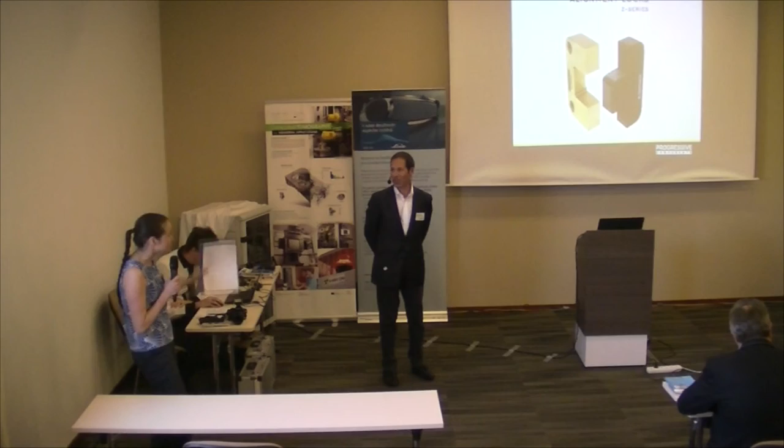I will have to do it in English.

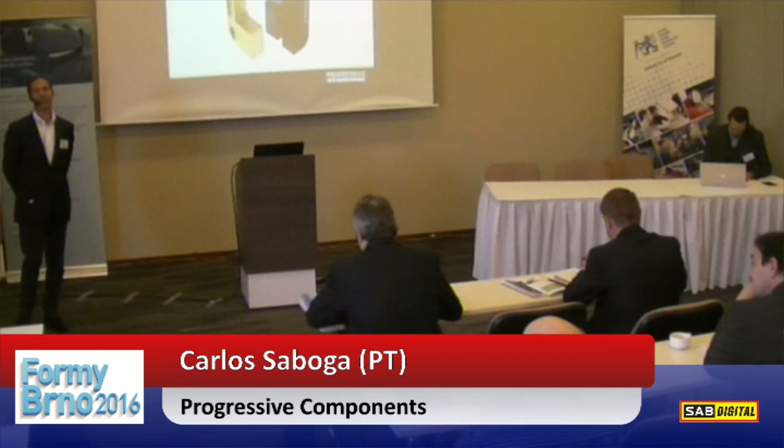We are proud to develop new solutions and come up with components that make a difference.

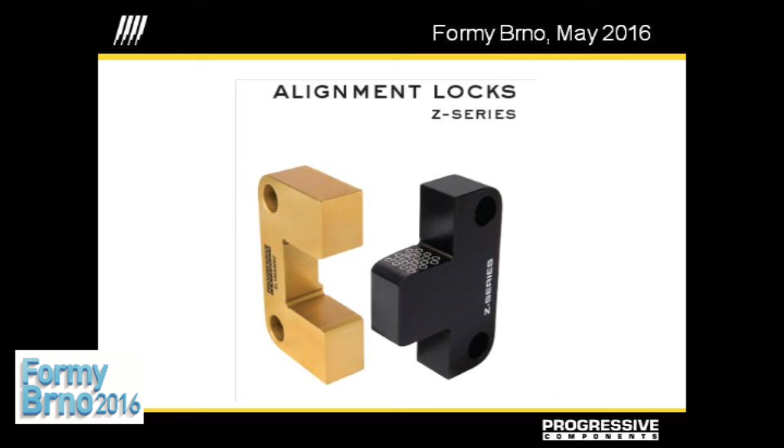Well, because ours, Progressive, make a difference. And I'll tell you why.

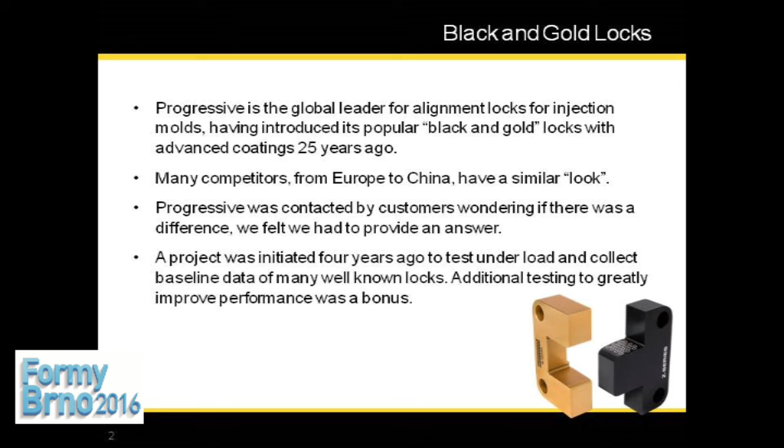This is just a picture of top locks, a pretty common installation in a mold of top locks.

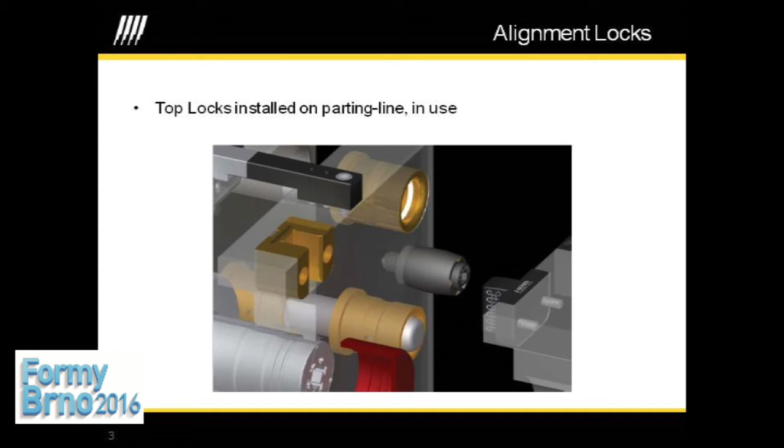So first of all, what is causing misalignment on molds? I don't know how many of you are tool makers, but I'm sure that you all do perfect molds. You do fantastic molds, the best molds in the world.

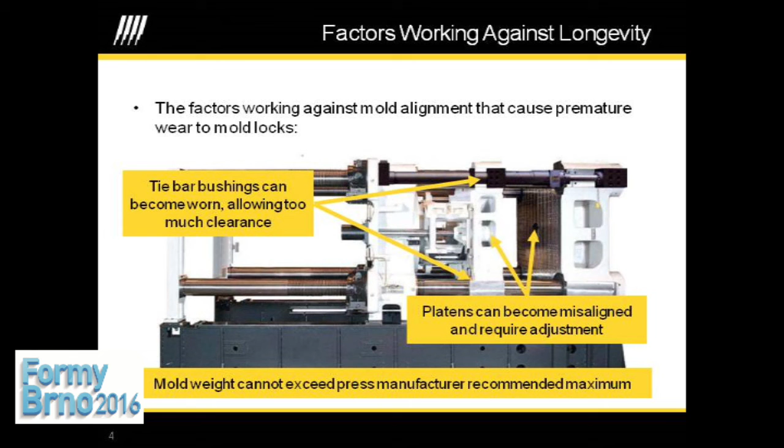And injection molders put very heavy molds, heavier than they are supposed to, in certain presses. And obviously, the press is not set to support that kind of weight.

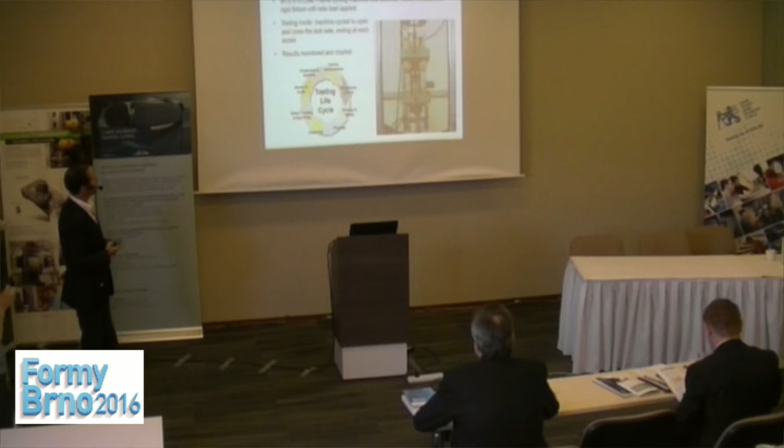And we cycled the different alignment locks, closing and opening, and making sure that every time the opening makes the locks come out of each other. So they are not always touching each other. It's just like replicating a mold.

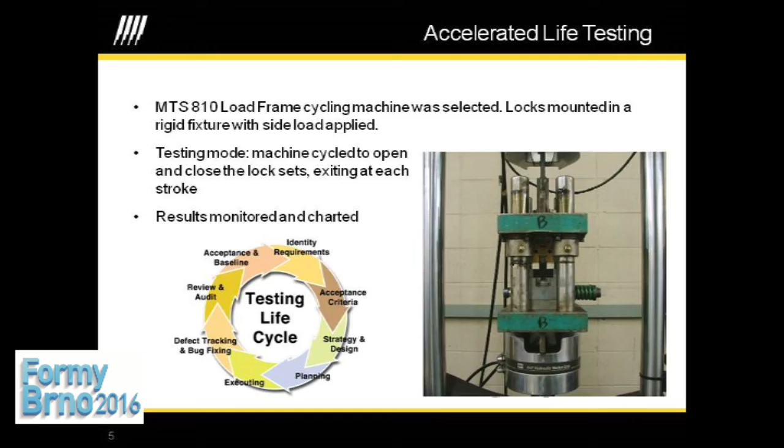Still, we found in some cases with some of the locks that we have tested already adhesive wear at 67 cycles. So some of them have started to have the adhesive wear at 67 cycles. That's nothing. That's not even trying the mold.

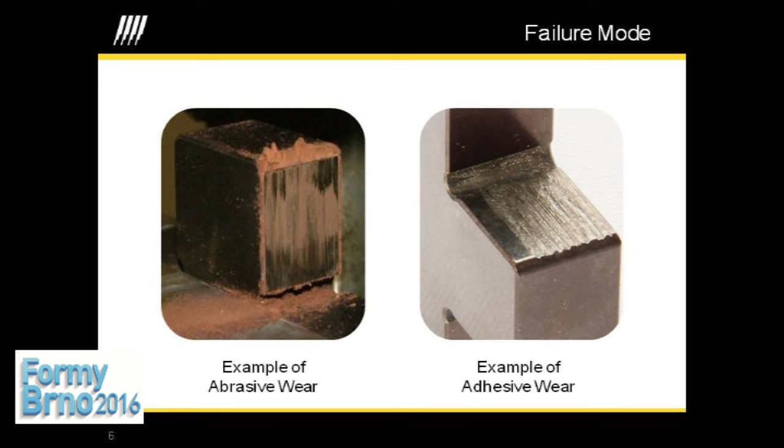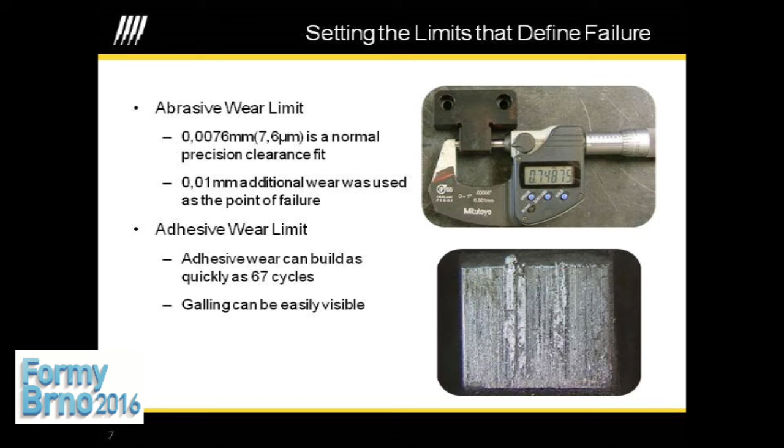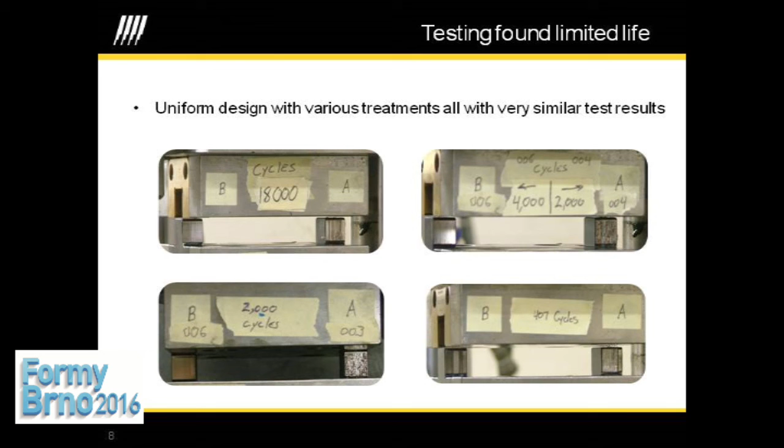So what this test also helped us to do was to benchmark and to find out how could we improve our own locks. And I will not be able obviously to share with you all the information, but we have some proprietary methods of hardening and coating our own locks.

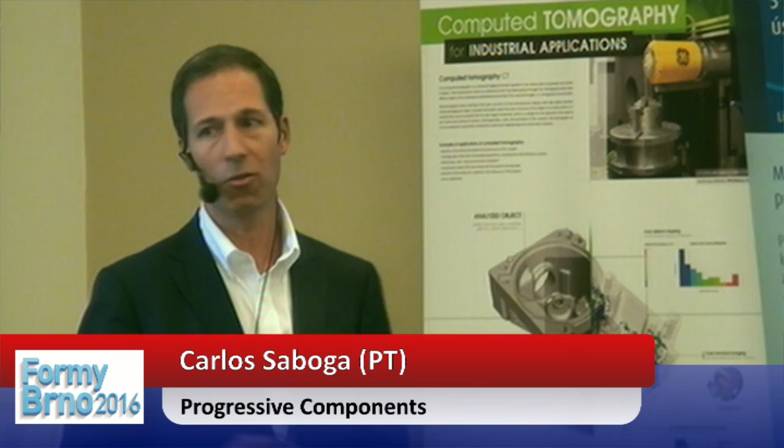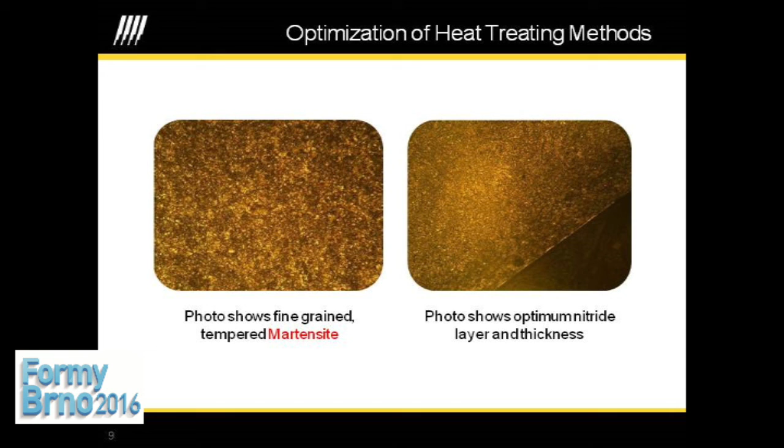So some of the different features we've got, the engagement ramp.

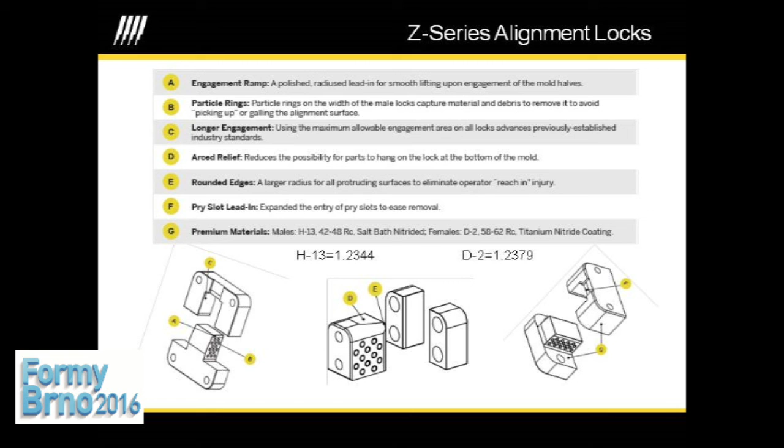That together with our proprietary methods of heat treatment and the coatings, we've got titanium nitride and we've got salt bath nitride.

All this combination makes a very strong lock.

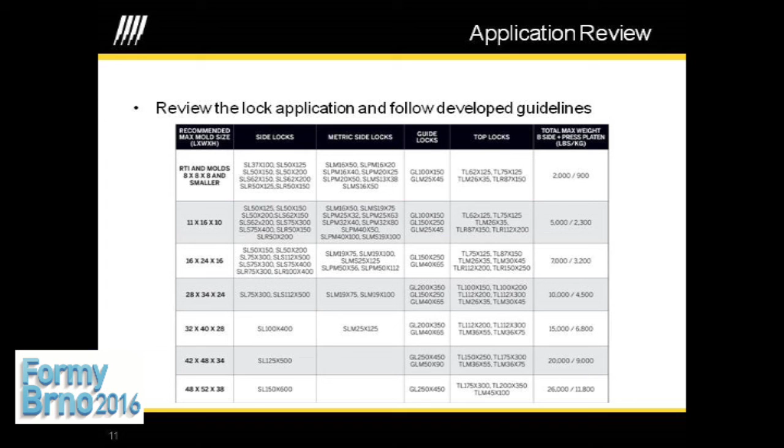We have customers that run this dry, without any grease. We do not recommend that, but it's possible.

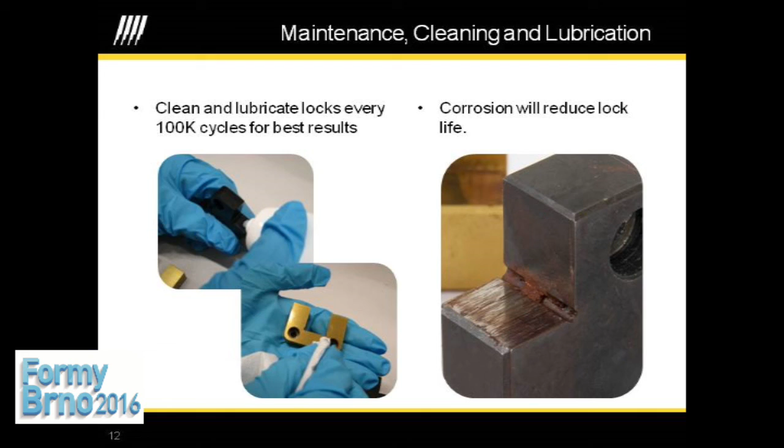So going back to the comparison with our competitors and all the locks that you can find in the market, it was clear that the best from our competitors were failing, and when we talk about failing it was the adhesive and the abrasive wear, were failing at maximum at 225,000 cycles, whilst ours, exactly in the same conditions, have endured 2 million cycles and we couldn't find any wear.

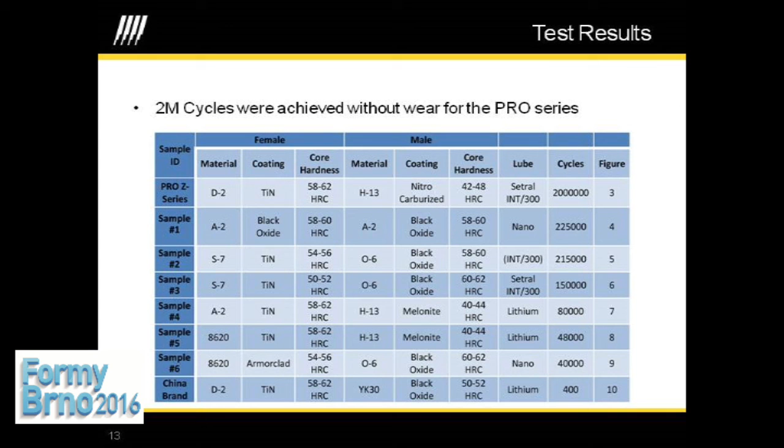We've tested a good number of them, of different brands. I won't say the brands, but you know all of them, or most of them. There were more than 21 samples, so it was more than 21 different locks from different manufacturers. All of this was tested exactly in the same conditions.

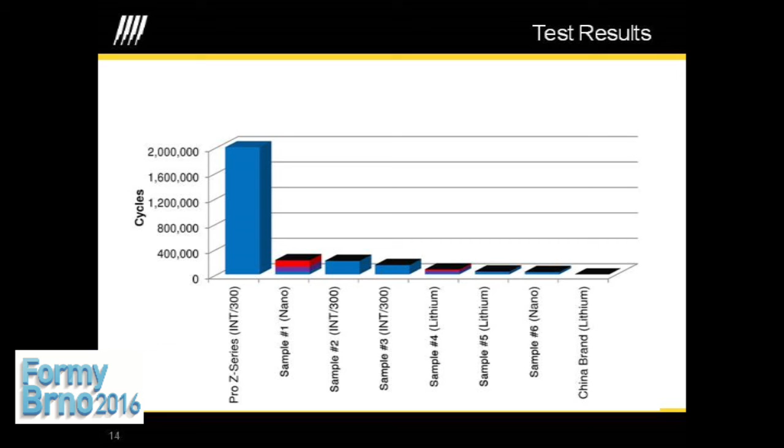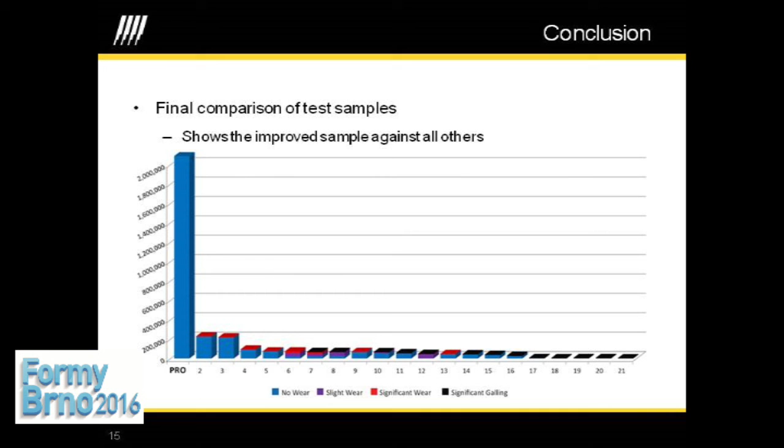So you must be thinking, okay, that's good, that's nice, you made some testing. Are you prepared to make a warranty on what you're saying? Yes, we are. Indeed, we are doing that.

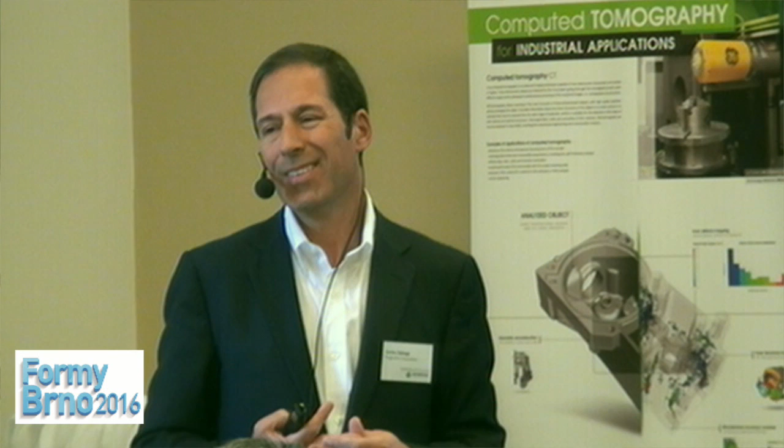So, just to conclude this part of my presentation, you can imagine, and I come across this problem very often, that customers say, my mold is beautiful, but just because of a stupid component, it stops a lot of times and I have a lot of downtime. And obviously this is money coming out of my pocket.

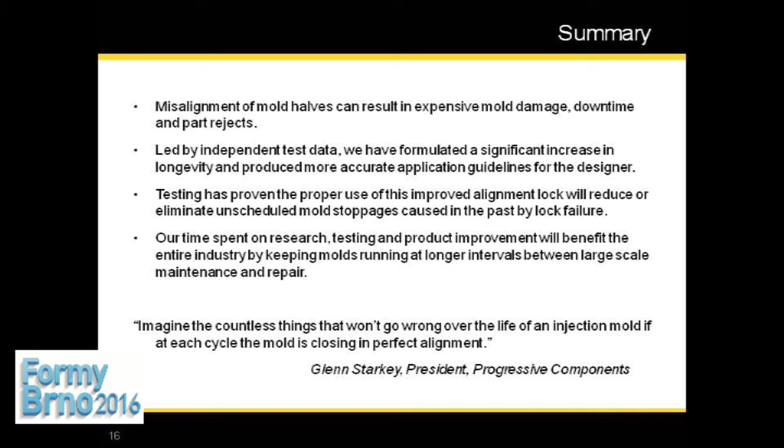So we strongly encourage our customers to choose better components because overall their molds, not just the adjusting areas and the molding areas, but also on the component side, will run longer without so much maintenance and with good performance.

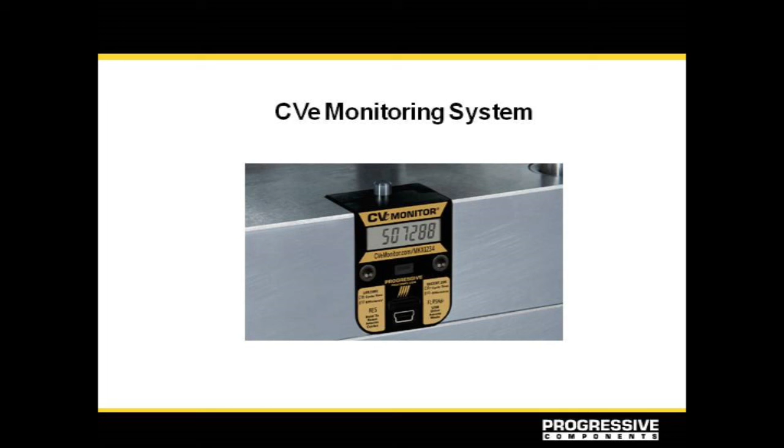I think a good number of you should know the cycle counters. It's a very common component that most injection molders like to have on their molds. Those cycle counters are just counters, like an odometer of a mold. It counts the cycles, and you know how many times it's been closed. But that's it. You don't know anything else but the amount of times that the mold opened and closed.

Progressive Components is the original manufacturer and original developer of the cycle counter. You can find cycle counters in different colors: orange, blue, green, and black, because it's our color, but there are a few that also use our color that might not be exactly the original. When I talk about blue, green, and orange, you already know who I'm talking about, and those are very well-known brands in the market. But these brands are buying them from Progressive. They're not developing the product, they're not producing it. We are, and we deliver to them.

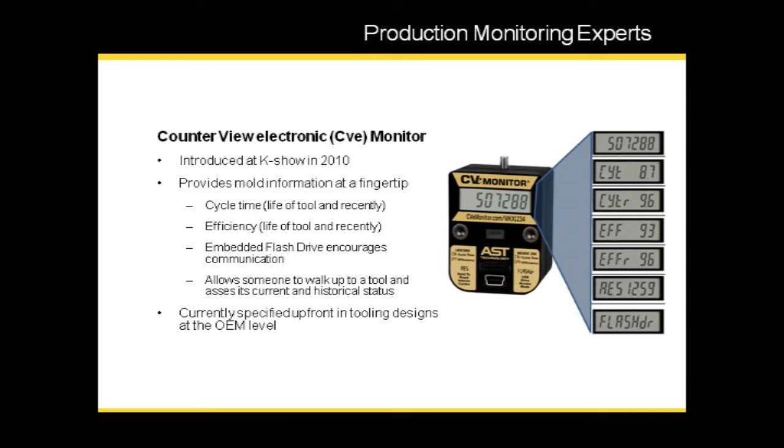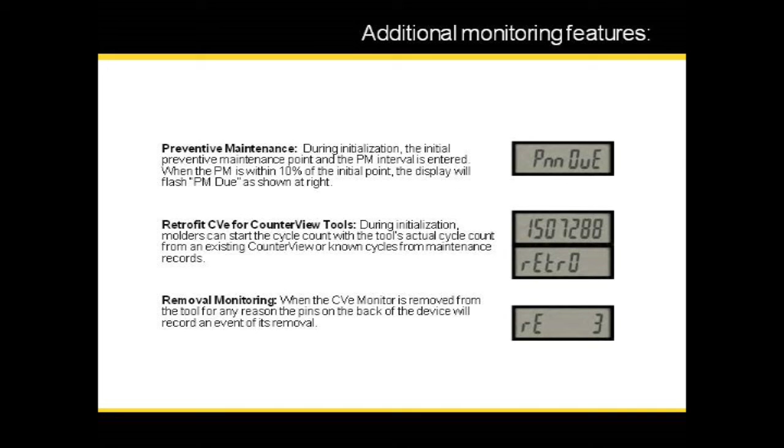When you do that, it will make a record that you have removed it. So anybody that wants to run the molds without the monitor and not willing anybody to know that they removed it, that's not going to happen. It will show when it was removed and how many times it was removed.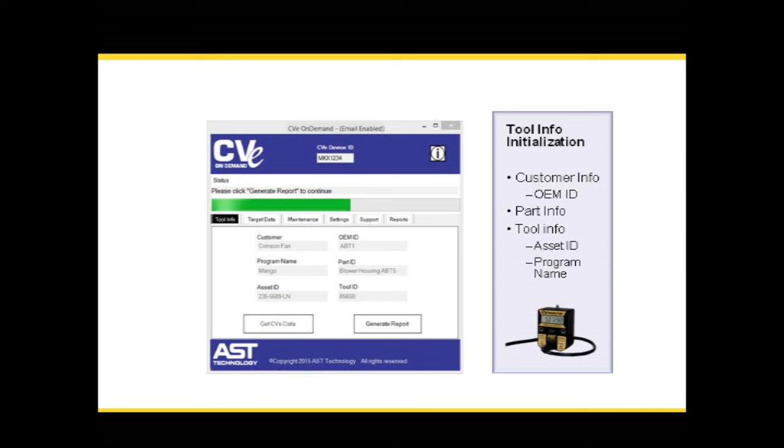So you have a maintenance tab where you can actually make a record of what you have done on that maintenance. So not just the fact that it gives you the information about when you have to do the maintenance and makes a record of that maintenance - it's got also the possibility for you to inform how many times you've done a certain service and what kind of service you have done on the mold.

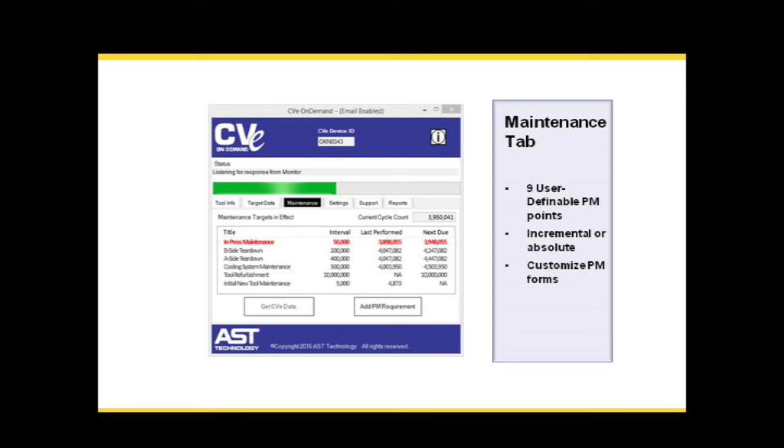You also have the possibility of using checklists. The checklists probably are not yet translated, but it's also a possibility. You don't have to create your own records - you can use already predefined templates, records where you just tick boxes.

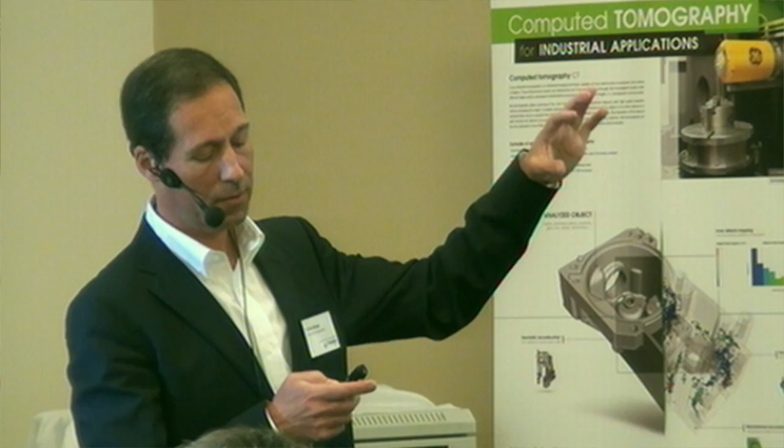So this is an example of charts, of graphs, where you have the information.

It gives you the target efficiency, it gives you the target cycle time. These were the things that you've set up. And then it gives you where you are. Green means that it's within certain tolerances, I think it's plus minus 2%. Yellow is going to 5%, and red is outside of 5% of your limits, the limits that you have set up when you started the software.

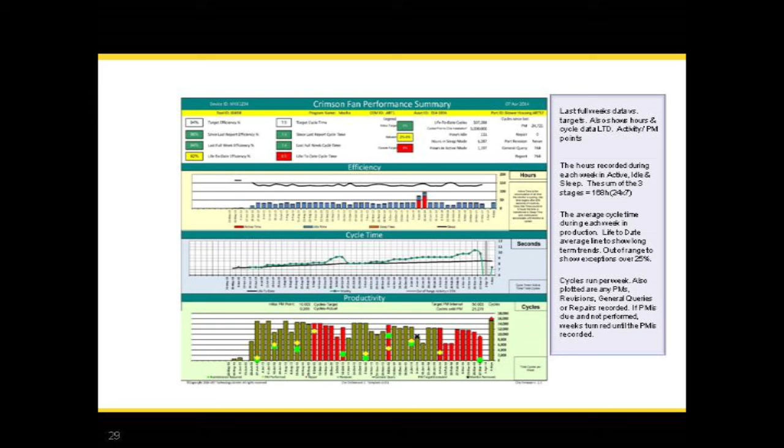So this is also a mold activity report, which shows what you have done during the maintenance. It's another type of information, a log activity that you can create and that can be used by other people who have access to the monitor.

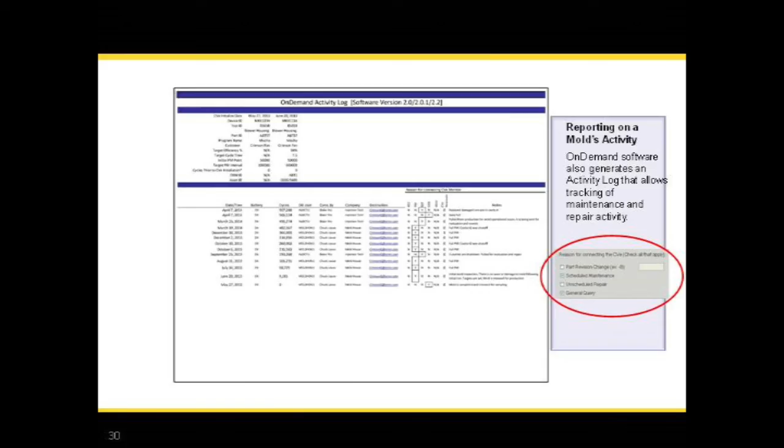So just a summary of the features. Size is compatible with the mechanical counters, so it's just taking out a mechanical one and putting this in. It's got a 7-digit display.

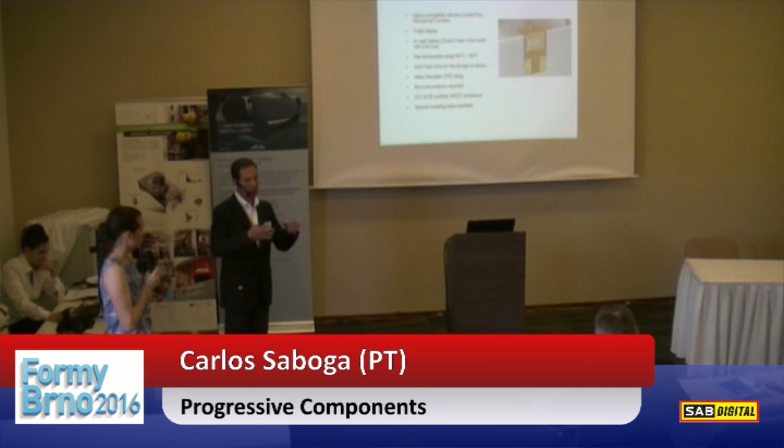Very quickly, maximum temperature range is 90 degrees. I know some of you would be using it with higher temperatures. For that, we would recommend making the pocket with some insulation plates, or assembling in a different plate and putting a bigger plunger.

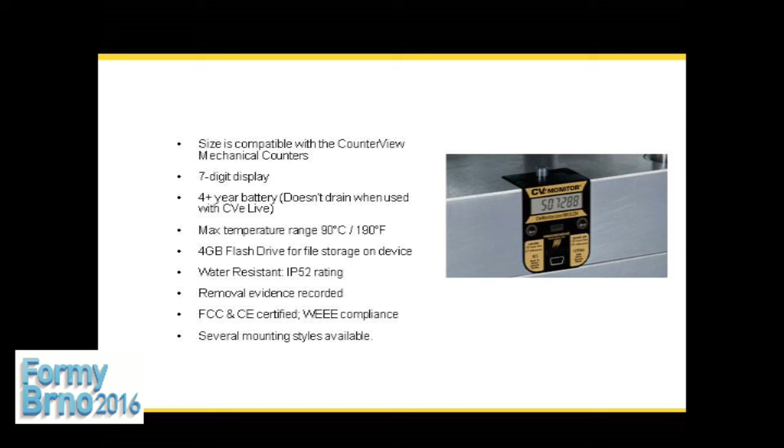So now something a little bit more exciting, going live. Up till now, what I was talking about was connecting with a laptop, for instance, directly with a USB cable to the monitor.

But we have another option, and that option is live. You can have your mold running in China, why not? The mold is running there, I don't know what's going on there, and then if something happens, I'm in the dark, I don't know.

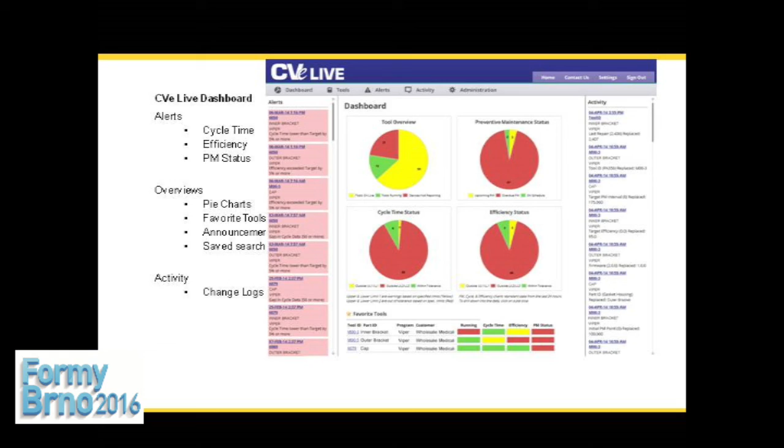It gives you information as detailed as hourly, so you can check hourly what's the performance, or per week. All the information is available and it's live, and it's almost all the time online, refreshing.

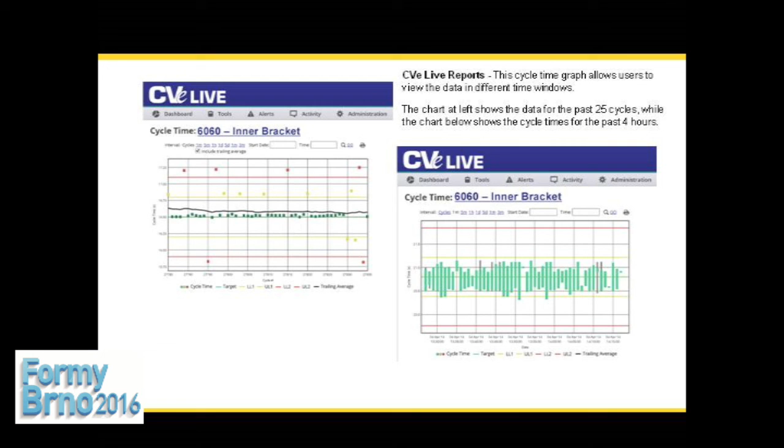So this is another example. So, why monitor? Yeah, because we should know what's going on. And for mold makers, because the people that are only on mold making might think, yeah, this is much better for the injection molders. That's not so much for me.

But it is also important for the mold makers, because most of the time when you get a phone call saying, hey, your mold is not running, we have a breakdown, you have to come over and fix it, you don't know why they had that breakdown. And you're completely in the dark. You get there and, okay, there's an issue. Why? Why did it happen? What was the cause of this issue?

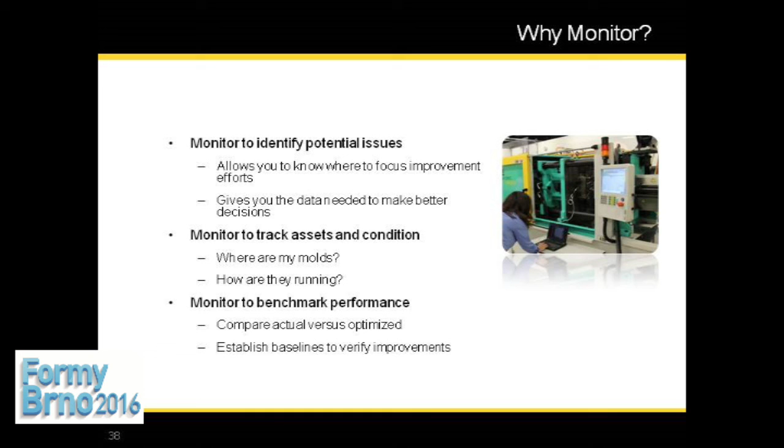So for mold makers, it's a question of warranty. When I give a warranty on my molds, well, I need to track what they have been doing with the molds that I've produced, so that I can keep my warranty.